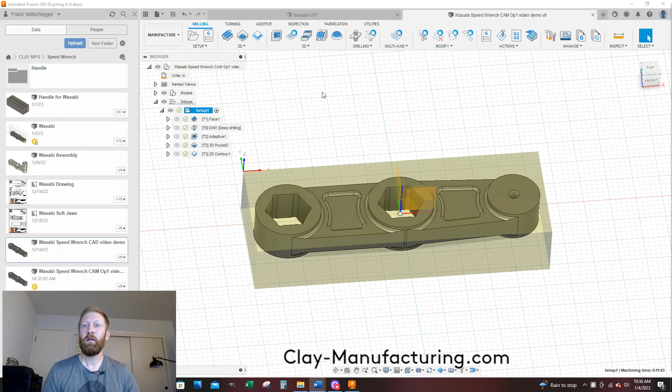This is the Wasabi. It is CAM Op 1 Part 2. My other video was CAM Op 1 Part 1, which went to 30 minutes so I had to end it. This one we're picking up working on the top side of our Wasabi Speed Wrench. If you don't know what I'm talking about, go to my CAM Op 1 Part 1 and pick up there. Now let's look at where we left off, here on my last video where we cleaned up the inside of this hex. Now the next move is we're going to clean up the outside of this part. This is where we left off.

We're going to go 3D and do contour. For tools, we're going to use a 3/8 flat end mill, that's my tool 2. So a 3/8 flat end mill, select. Then spindle speed, 6,000. I'm using my defaults, 30 inches, and you can look at them and double check for yourself.

So for geometry, this is where it's a little bit tricky. For additional offset, I'm going to try not to do additional offset and see what happens, because I have my notes I'm looking at, so I know what should work.

All right, so you want to do avoid touch surfaces, and we want to tell it what surfaces we want to touch. I'm going to go, for the mode, touch. And I'm going to come over here and select all these faces that I want my contour to touch.

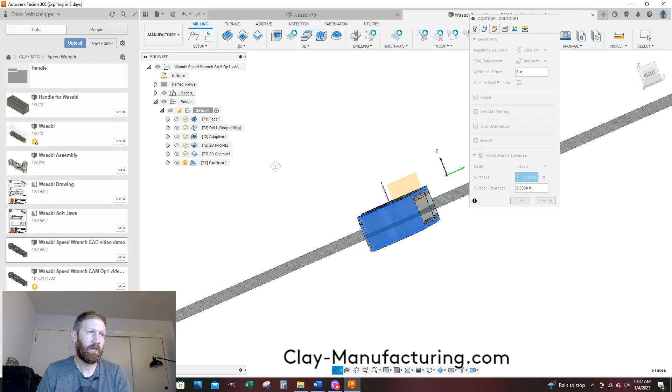So that's good, it says I have 5 faces. My instructions say 7, so probably these 2 guys. I'm just waiting till it kind of turns that weird white. And if you select the wrong surface, I believe you can click on it again. Oh no, you can't, you might have to clear it all out. I lied, so don't screw up.

7 surfaces looks killer. In my notes, I have an offset of 0.5 here. I'm going to leave it off there, and if I have issues, that will be my issue.

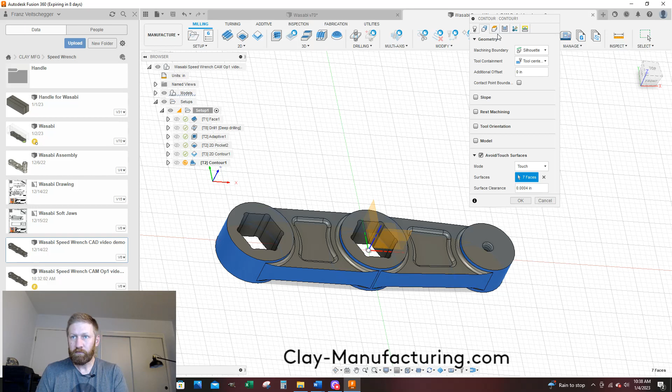Then let's go to heights. For model bottom, we're going to shoot past. I'm going to leave all these, and we're going to go negative ten thousandths, negative 0.01. And then for the passes tab, this is where you're going to get some Fusion annoyances. Maximum step down is 0.4. I want it to go all the way down.

And then it says cusp height. Cusp heights are typically when you use a ball end mill. I'm using a flat end mill, so this irritates me deeply. But it's just going to have orange, as long as your toolpath is produced, it will work fine. In the meantime it's going to have these stupid little orange warning signs saying it doesn't like what you're doing, but it will work. So for flat area detection, I'm going to deselect that. I'll leave this, I'll select smoothing, and I think we're good there. We're just going to have this glaring at us for the rest of this project.

Fun, no multi-axis. Linking. Ooh, I have this all squeezed up real tight. Maximum stay-down distance, 2 inches. I'm going through here just making sure. I think this is all the same.

Oh no. I want to, for the horizontal lead-in radius, let's make that big, because it's going to roll on the part, and we want a nice sweeping lead-in so it's hard to see witness mark. So we'll go 0.2, pretty big. Go 90. Vertical lead-in radius, nope, don't want that. We'll say 0.0. So all I changed was horizontal lead-in radius and vertical lead-in radius.

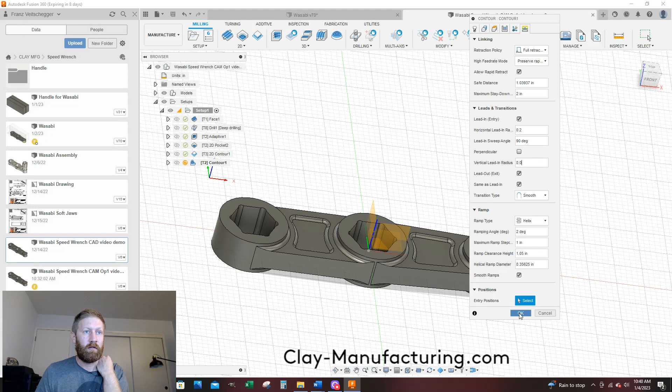And now let's say OK. And this is talking about that warning from the passes tab. We're going to say yes. And so it didn't generate, and I guarantee you it is because of what I said in the beginning.

So let's right click on here, say edit, and I'm going to go to my geometry tab, and give it that offset that I had in my note. So it didn't know what to cut, we need to fix that. I'm assuming the way this is working is I need to give it offset because it's tool center on there, so it's going to cut the geometry. This is a 3D toolpath, so 3D toolpaths recognize 3D geometry, and it's like okay, I'm going to cut this thing, so it's not going to work. So let's say 0.5 to get an offset to kick off of there.

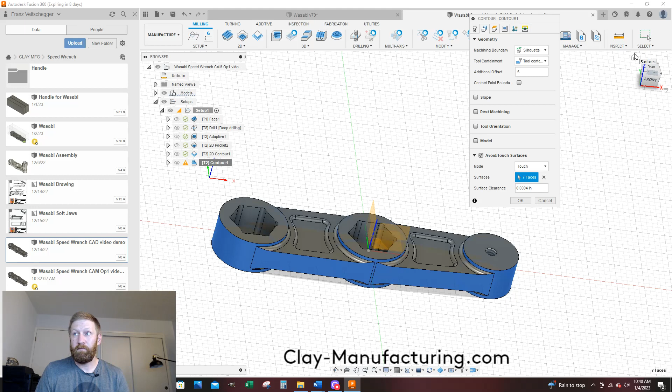That's what I'm assuming, don't take that to the grave in case I'm wrong. This is just a warning from my cusp warning. There we go, so it does this kind of kooky lead in, lead out. That's okay, it's going to work. That's how I've been doing it in the past, and it works fine.

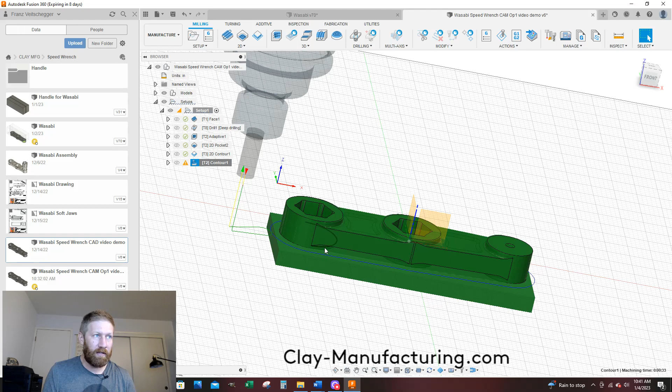So the whole reason it's kind of weird to set up is because we have these different depths right here. It's not just one solid part. The bottom of the part has these stands, and then it's got these that are at a different level, so it gets confused.

There's another way you could do it where you could actually project a sketch to the bottom and then just select that sketch, and then do a 2D contour, which is probably easier, but it's a little more complicated trying to create instructions around it, so that's why I'm doing it this way.

And this orange warning is because of the cusp height. We're not using a ball end mill, so just ignore the warning. And I'm going to say save.

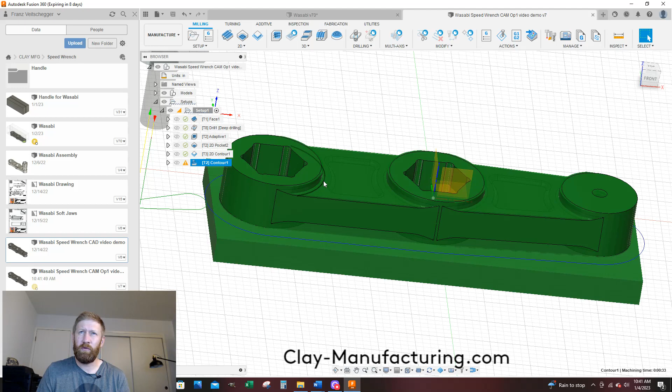The next one I'm going to attempt is the 2D contour. We're going to do a 2D contour. Let's look at it, let's look at my cheater one. So these are what I'm going to do next.

I played with a lot of adaptive strategies. I didn't like the surface finish they gave me. So on here, I did a 2D contour and did 2 passes to clean up these flat webs.

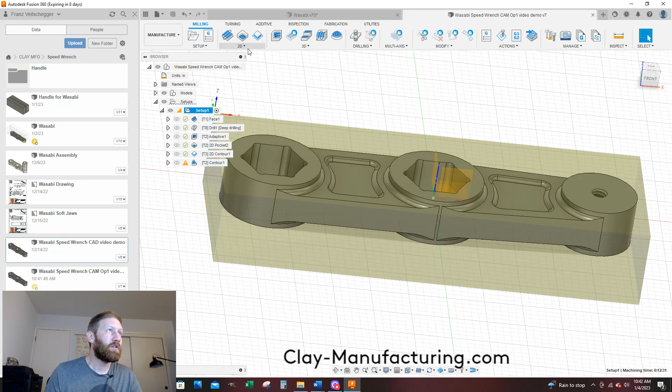So let's do that, let's go 2D and we're going to go contour. And we have our 3/8 flat end mill, 6,000 RPM, 30 inches a minute. So for our contour selection, we're going to do one side at a time.

So I have it set up. We're going to go select and select. I think that's all for this one.

We're going to go to my heights tab, and I'm not going to change anything. We're going to go to my passes tab, this is where we might have to do some stuff. So we want to do multiple finishing passes, so we're going to check the box, and we want 2 finishing passes, and for the step over, let's say 0.2.

Since it's only removing like 5 or 10 thou off the bottom and sides, I think it's 5 thou, we can do a large step over and it's not going to break our tool or give us chatter. It shouldn't, so we'll go 0.2. Finish feed rate, we'll leave that at 30. We'll turn on smoothing, and hopefully I didn't miss any notes.

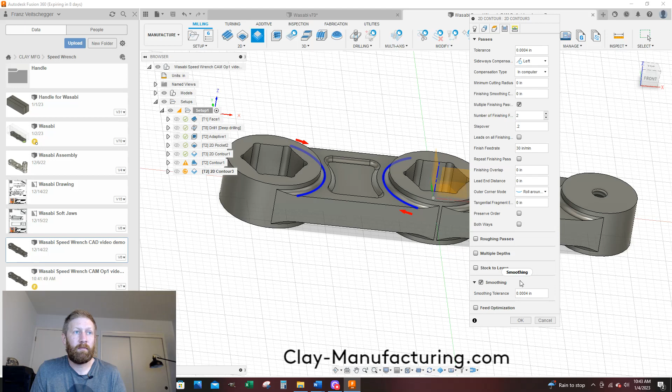Let's go to my linking tab. And let's go 375, 90. Let's get rid of my linear lead-in distance. We'll zero that out. Vertical lead-in, we'll zero it out because it starts off the part if we did it right.

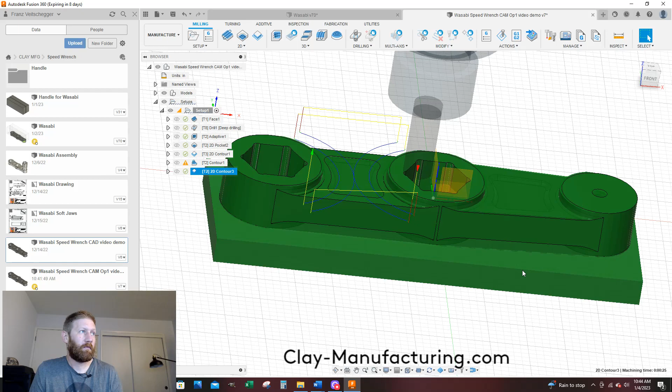Why do I have something clicked? Perpendicular, no, yep, all right, looking good. I'm going to leave these and I'm going to say okay. Oh yeah, that's looking good. So you see it starts off the part, it does this little lead-in radius and then cuts and walks in, it looks like. Now that's good.

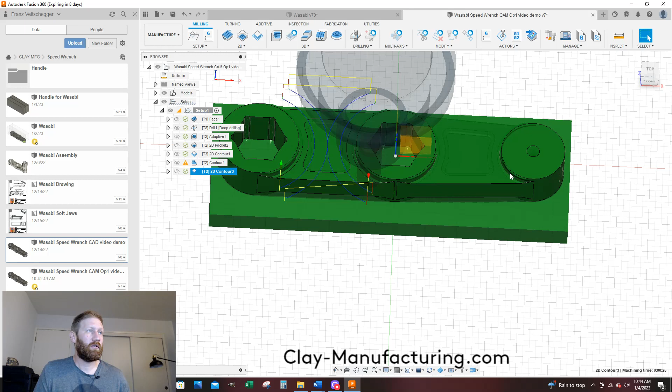Why did I break it up? I don't know right now. So I'm going to... I don't know why I didn't select these ones on there too. I'm going to show you how to duplicate a toolpath, and not to confuse us more like I've been doing, so I'm going to right click on here because I want to repeat this on this web.

And I'm just going to say duplicate, but I got to select different geometry. So I can click on here and I'm going to right click and say edit. And for geometry, instead of those chains, I need to select these ones. And you notice, I wish I could go back in time and fix it, but I selected this bottom part and not the top part of that radius.

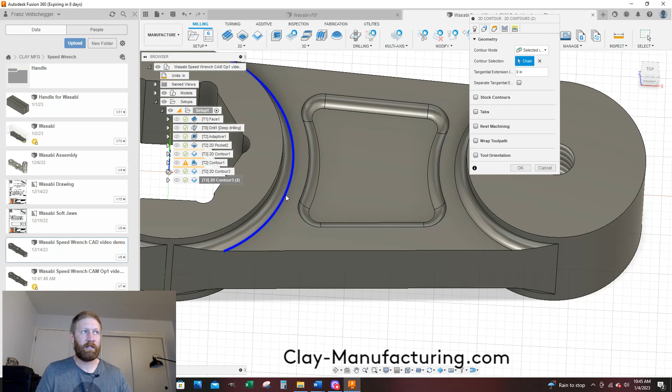Let's clear these out, and now I'm going to select over here. So I selected the bottom right there. It's kind of the transition where it blends into that bottom face, and then right here. And everything else should be the same. I'm going to just say okay.

Ooh, it's not. So you see how I have these little chunks right here? This is why I did it, and I didn't have it in my notes. So I probably changed my step over. There's a little triangle that I didn't clean up there. So let's look what I did on my other one.

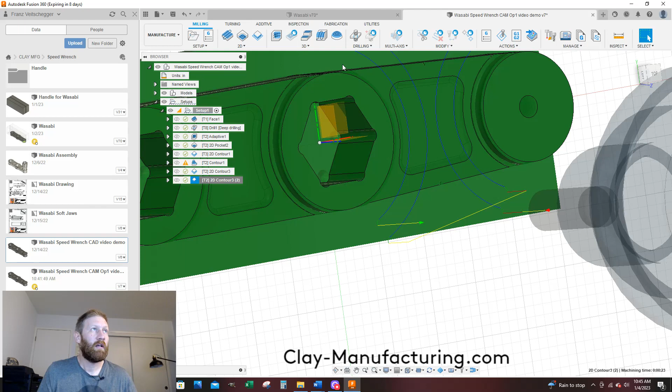So on this one, I might have changed my step over. Let's go edit. Yes, I did, I increased that step over, but I didn't put that in my notes. Shame on me. So you see what I did there - in the beginning I just selected here, and then I was like, why didn't I just select this geometry while I was at it?

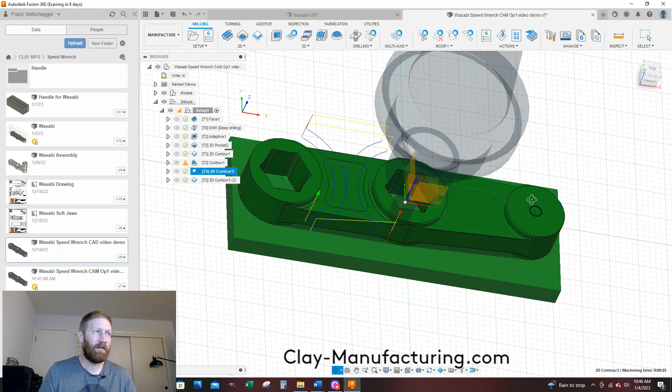Well, it's shaped differently, and when I use these same parameters, it didn't clean up over here. Maybe I could have tried a 0.25 step over here, but then these would have overlapped more. So I did it different - you can do it a little bit different if you want to. This isn't a big deal, it's just how the surface looks.

And then this one, so I copied everything besides the geometry selection, but it left me these little steps right here, which aren't going to look too cool to my customer, which is me or you. So I'm going to right click and say edit, go to the passes tab, and increase the step over to 0.25. So all I did was right click on the contour, edit, clicked on passes, set it to 0.25, not changing anything else. We're going to say OK.

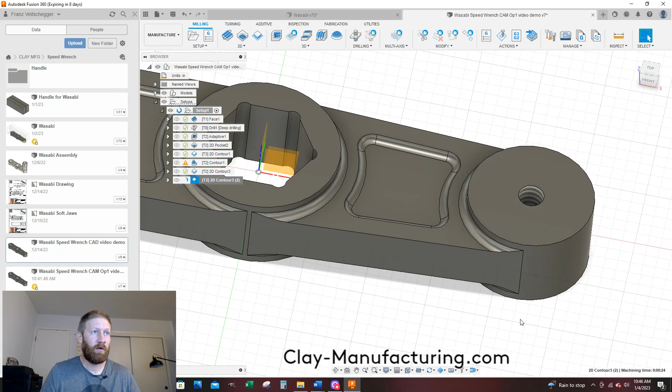And voila, I have that weird little nub - it has been removed, taken care of. Cool. And I'm going to say save.

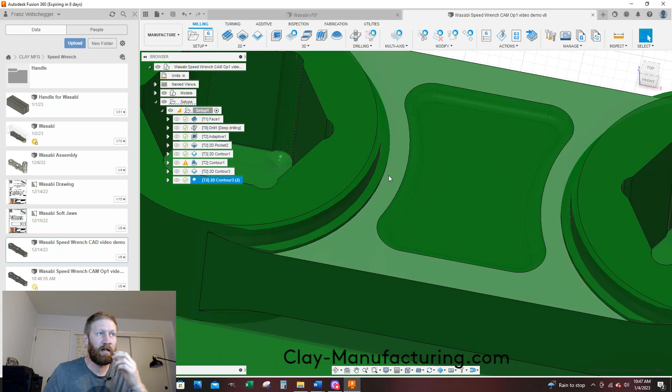Now the next one, we're going to introduce our 1/8 inch ball end mill, and we're going to try to gently cut these weird steps out and then put our nice finish on there, because that horizontal pass gave us a surface finish here. So let's attempt this one - this one's going to be tricky. These are a little bit tricky.

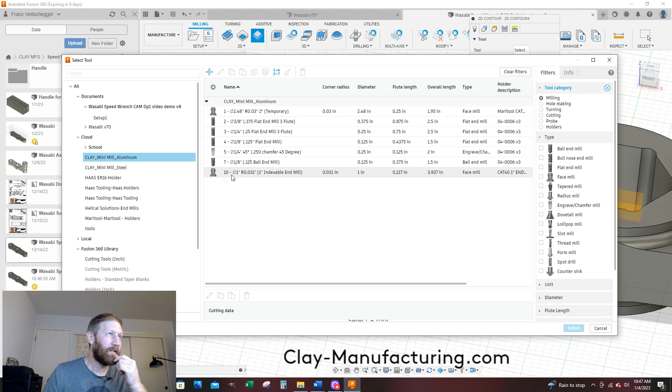We're going to do a 2D contour, using an 1/8 inch ball end mill, so I'm going to go get my tool. Let's go to Clay Mini Mill - my 1/8 inch ball is my T7. Say select. 6,000 RPM, have that baby maxed.

Cutting feed rate, we're going to increase this to 20 inches a minute. 20. And then these ones update, that's good. Leave these bottom ones. Now for the contour selection, this is what I pulled my hair out with last time.

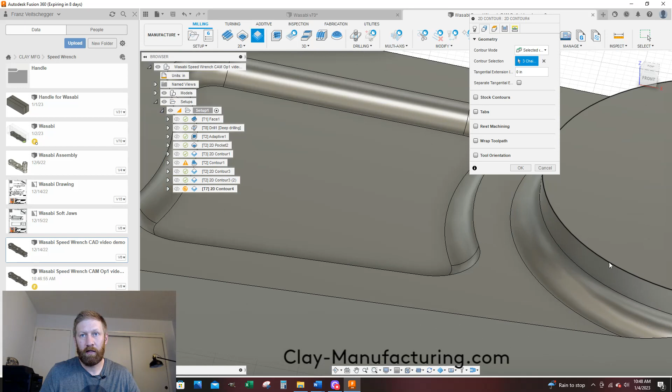Is I need to select this guy right here, and I need to select this guy right here. Now I may come back, I don't remember if I did all these - let's just try it for kicks. So we're going to select there, and yeah, I think I did all of them. I did 4. So here, I'm selecting the top where the radius meets the vertical wall.

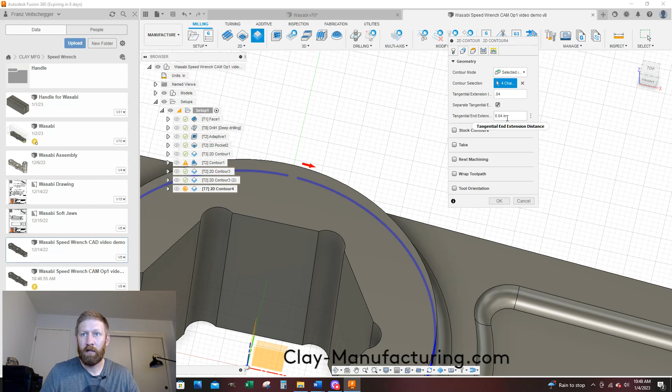That's what I'm selecting. And now for my tangential extension, I want it to come off - that's where it's going to come off the part. We're going to say 40 thou, 0.04. And I also did a separate tangential extension, I clicked here and 40 thou. And I believe that's all I did here.

Now my heights tab - for my bottom reference, I want to do a selection. So I came down here, I'm going to go selection, and I want to tell it that this is the bottom, I want that to be the bottom. And then for the top height, I left that as a default. And then we're going to go over here to our passes tab.

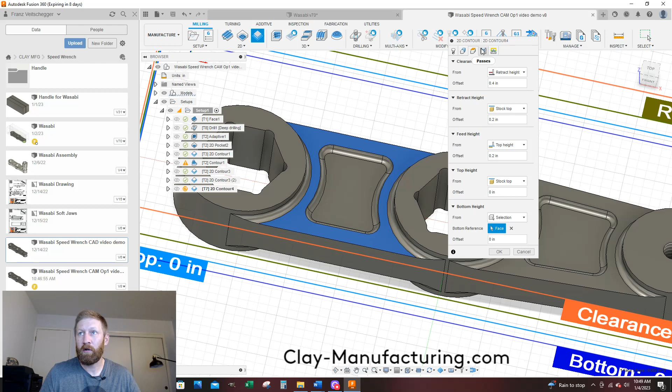And we are going to increase it, we're going to do 2 passes. I want to kind of gently walk in, and I'm going to leave the tool from coming in contact with the floor right now, because I don't want to have 2 step over marks. I want to get it really roughed in close and then come with a final single pass cleanup. This is a pretty complex toolpath - a lot of stuff going on here, but you can learn a lot.

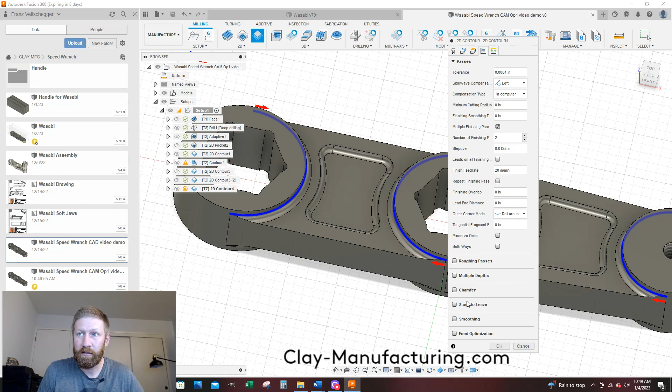So we're going to go multiple finishing passes, and this is 2, and my step over I left at 12.5 thou, 20 inches a minute, and then stock to leave - so let's skip down here to stock to leave. Let's drag you up a little bit.

Now on the radial, on the side of the tool, I did 2 thou, so 0.002. And axial, under the tool, I did 1.5 thou - yeah, so 0.0015, a little less. And you can play with those numbers if you don't like what you see at the end, but it came out pretty nice. So stock to leave, I left a smidgen more on the radial and a smidgen less on the axial. And a smidgen apparently is 0.5 thou in this example.

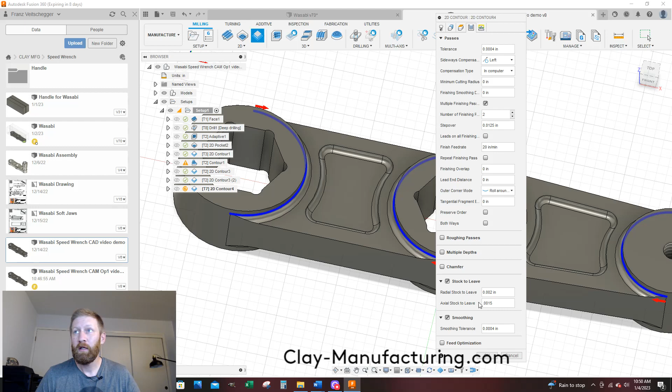And then let's do smoothing - so I'm going to select a smoothing box, and that's looking pretty good. Let's go to my linking tab and see if I need to change anything on here. Lead in, entry, horizontal lead in - I did a 50 thou here, 0.05. So horizontal lead in, I changed to a 50.

Lead in sweep angle 90. I got rid of this lead in distance, so 0.0. Vertical lead in radius, let's get rid of you. You're annoying me, 0.0. And I think that's good. We'll say okay.

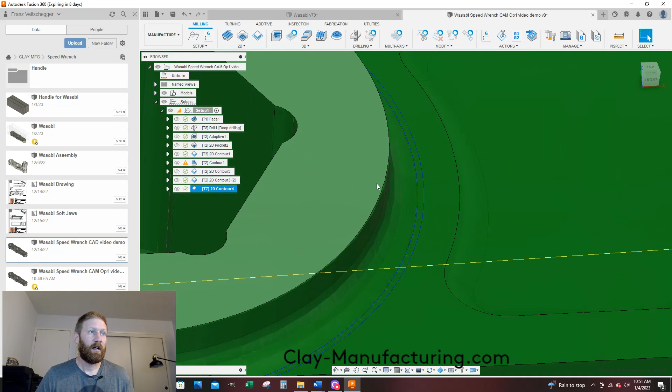And that's looking what I want. The reason I did 2 is because you see we have this weird step. So I kind of did one first that's going to probably be a little more chattery, and it's going to take off like the initial amount. Then I come in another 12 thou, and it does another kind of roughing. It still leaves, I leave a little radial and axial, so there's still a little bit of material. And I didn't want 2 marks on this surface. I want to come in and leave 1 mark because I'm being ultra picky on my surface finish. So I'm going to say save so I don't lose any of my work.

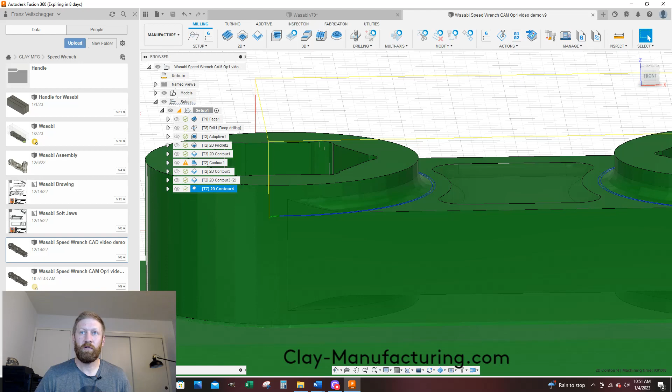We're going to do that little duplicate because I already have this all dialed in, and I'm just going to duplicate this bad boy. I'm going to go right click and say duplicate. And now I'm going to go on that one that I just duplicated, right click, and say edit. The thing I'm going to change is I'm going to go to passes.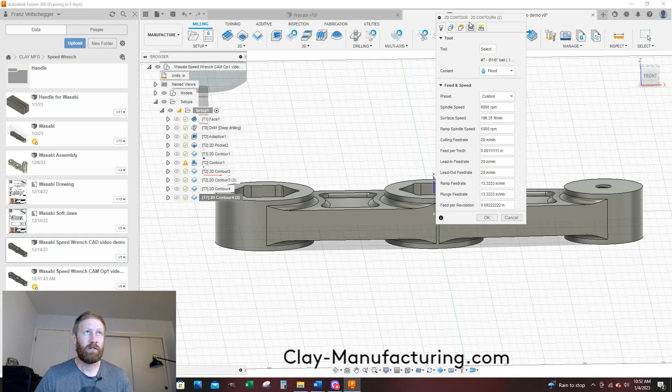No, I'm just going to deselect this. So multiple finish passes, no, deselect. And then stock to leave, get rid of you. And I want to do my feed optimization. I will leave the defaults.

So let's go over this. I duplicated my prior toolpath. I did a right click, edit. I removed the multiple finishing passes. I removed the stock to leave because I want to go down to my nominal size now. And I don't believe I touched anything else. We'll say okay.

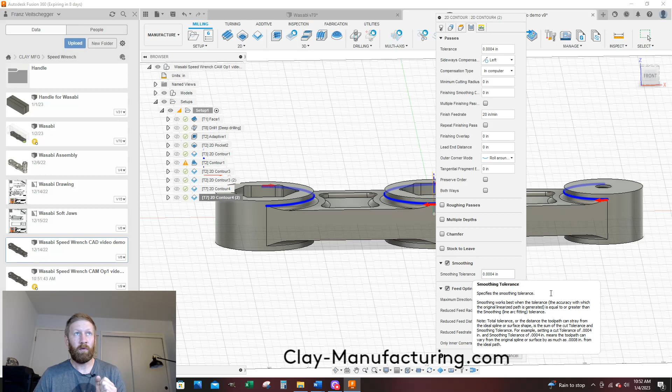So now that comes straight. The center of the tool is supposed to be on this line. And I modeled this at 0.0625 so it'll clean it up and then straighten up according to my tool geometry. And we're going to say save.

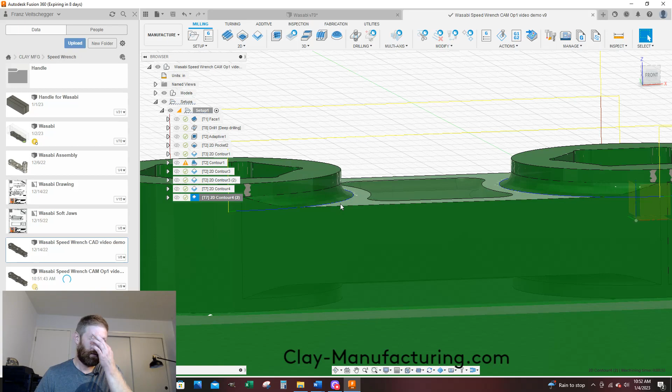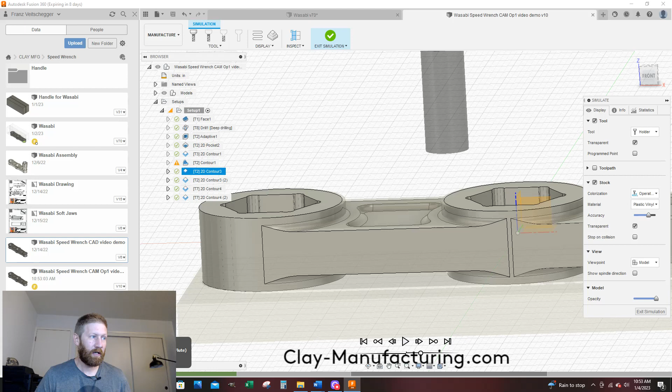So that's looking good, and you can go through here too. We'll go like this, I'm clicking on that one. I'm going to hold down shift and click on there just to select these end toolpaths. And I could go actions, simulate, and I'm just going to drag the bar down here and kind of go real fast. You could go through and simulate it.

And this is what I was wanting to show was this guy. Get off of here window. I'm going to say play. So that comes in there and you see it's going to knock off. It kind of blends into that wall and it knocks that bottom step down and it goes around there.

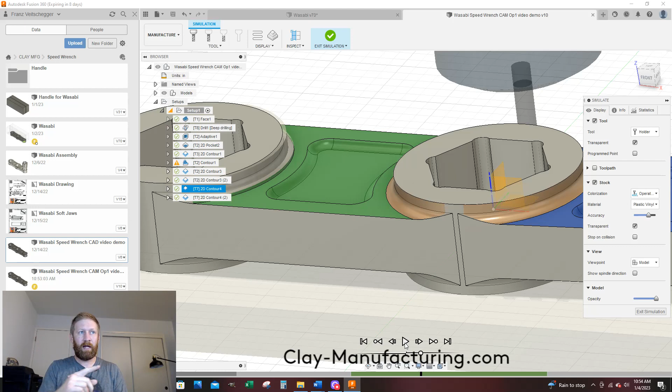So it's still leaving material here, material there, and it's going to come back. It's going to do the first pass, I guess, to the second pass there. Now it's going to come back and do that second pass. So now it has it where there's no step in there. So I'm basically roughing it in to the shape I want, and then I'll come back with one finished pass because I left material on the bottom of the tool and the side of the tool. And so when I come in with just one pass, I won't have 2 tool marks walking around there.

So it won't look funny. I did that in the beginning and it looked funny. That's why I know from my mistakes.

All right, so I exit out of simulation. Let's see what we did next. I already saved it. So let's see, oh yeah, so we're just going to rough out these 2 pockets, those pockets on the web. We're going to go 2D pocket.

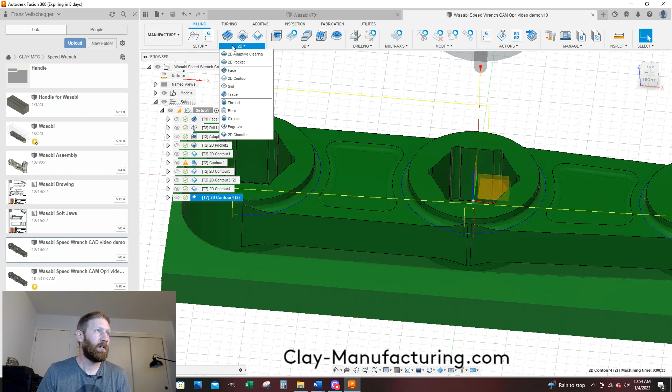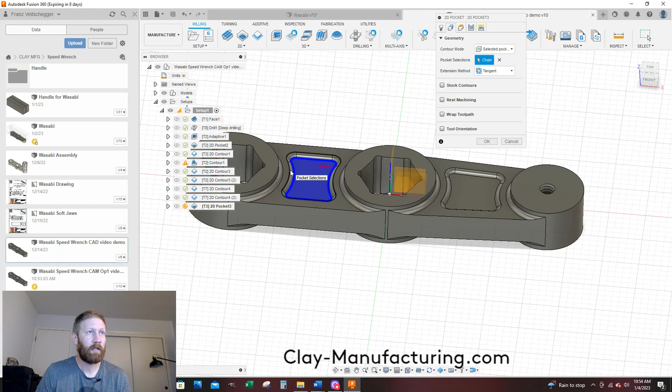And I'm going to do my 1/4 inch end mill. So select 1/4 inch flat end mill, select 6,000 RPM. We're going to leave our 25 inches a minute feed rate. We are going to come in here for geometry and I want to select this bottom ring right here. Same with this one, I'm going to go right here. So it's where the floor meets this radii.

Cool, that's what I want. I'm not going to do anything else with heights. Actually, I did change something here - for top height, I'm going to change this to model top. If you don't do that, it'll try to cut on the top of the part, and you need to change it to model top so it stays inside that pocket, I believe.

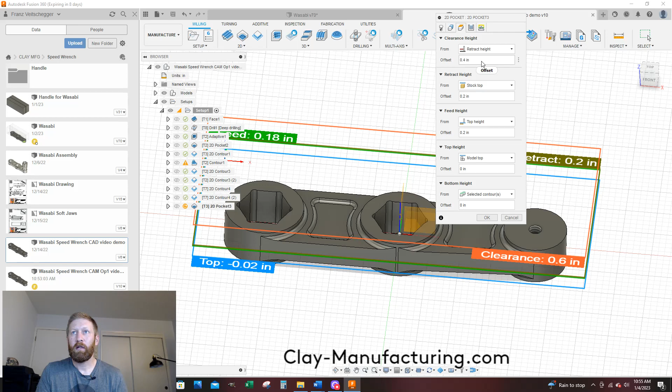I could be wrong, hope I'm not. All right, passes tab. Let's see what I did here. So max step over, I did 10% of the tool - oh no, more, because this is a 1/4 inch, so I did bigger. I did 0.0375 because it's going down, like it's a really shallow depth of cut. It's not a big deal. So my step over is 0.0375.

Stock to leave, I did 5 thou radial and axial. So 0.005, because I'm leaving material, because later we're going to come back and do this cool little detail with my ball end mill to make it look cool. So I'm leaving some material for that ball end mill to cut.

And then let's do smoothing, and we're going to do feed optimization. And I'm going to change the feed radius instead of 12 thou to 125 thou, so I'm just removing that 0. It's 0.125, so I updated right here 0.125 for the feed optimization.

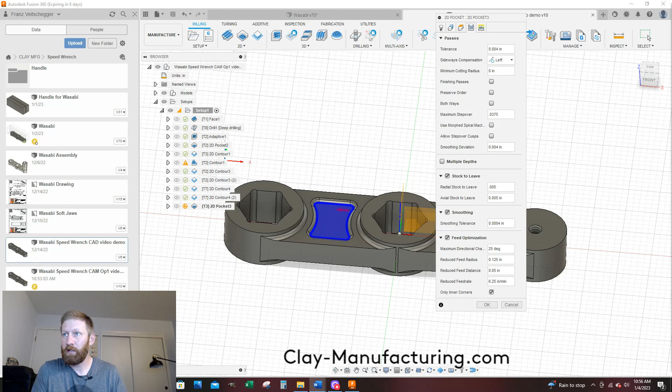My note page is too squishy. Let's go to my linking tab. Just kind of going through, verifying my numbers - 90, linear lead in, I left that. Since this is going vertically down, I left the vertical, because if you plunge straight it's a lot more aggressive on the machine and tool versus kind of a ramp or a radius ramp in.

It looks like all this, ooh, ramp clearance height - so I reduced this, maybe so I didn't helix in the air so long. So I went to 0.05. This is not crucial. Ramp clearance height, I reduced it from 0.1 to 0.05. And I think I left everything else.

Let's see how this sucker goes. I'll say okay. Cool, so this is kind of an annoying helix down. Top height, let me see something - I'm going to see if I edited that out of this one. No, I didn't. Okay.

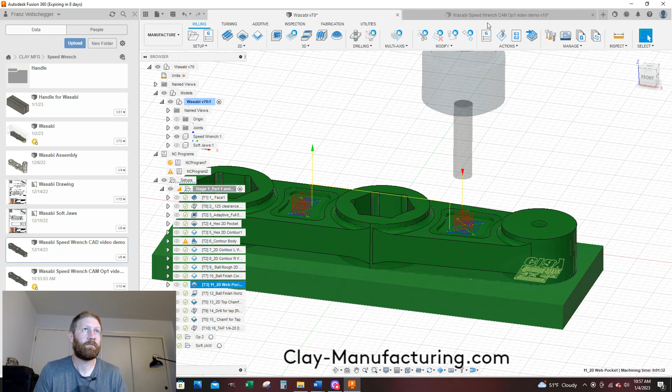You can play with your heights to remove that. It's just annoying because it's such a slow feed, so it's going to sit there and helix and cut air for a while. But if you're new to this, that's not a problem to cut air. But if you're trying to make money, you need to reduce that air cutting time because you ain't making money cutting nothing. So that's looking good.

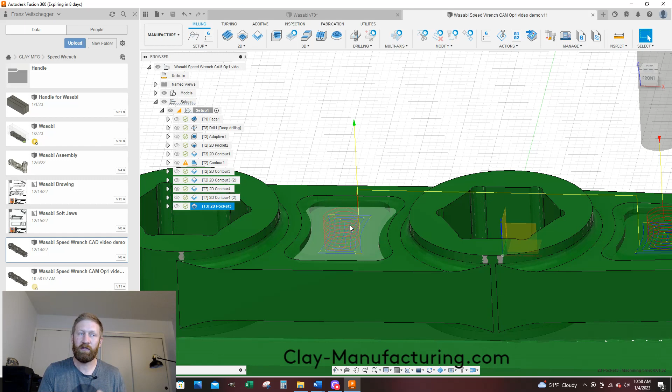I'm going to save. And so the purpose of that tool path, because I'm going to stick my 1/8 inch ball end mill in there, but I couldn't just do it initially because that's a lot of material for it to remove. So my 1/4 inch end mill is a lot stronger. So I come in, I rough it out, I leave a little material on the bottom of it, and also you see there's a lot of material here on the sidewalls where my tool couldn't go, based on my settings. And really that's okay for what we're doing.

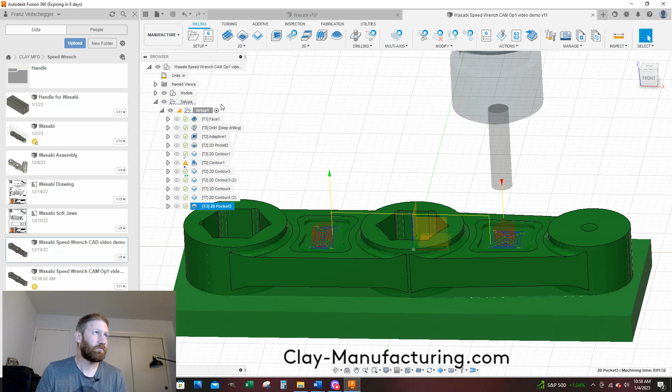So my next one is going to be a horizontal, I believe. So we're going to do a ball finish horizontal. We'll go - no, it's not a 2D, it's a 3D. We're going to go 3D horizontal. And I'm going to leave this thing at 6,000 RPM. We're going to reduce the feed rate to 20 inches a minute. I'm going to start speeding up a little bit because, man, this is so time consuming.

That's looking good. We're going to geometry tab, and then I want to do a selection, and then tool outside boundary. We'll change additional offset to 0.125, and that's good for here. Oh, I gotta select geometry, stupid.

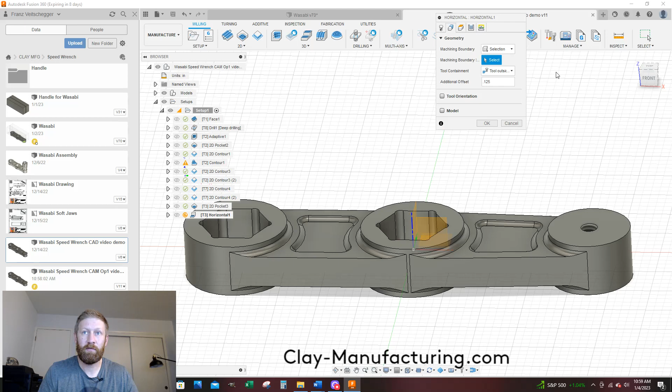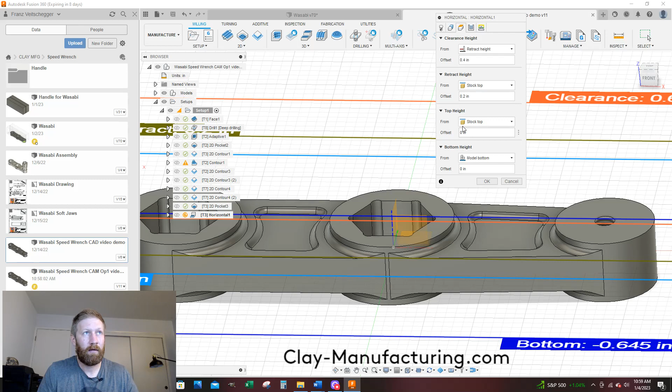So for the machining boundary with this highlighted, I need to come down here. I'm going to select this guy, and then I'm going to come and select that guy right there. So now I have these two chains selected. Now let's go to heights tab, and for the top height, so I don't machine anywhere else besides inside of here, I'm going to go top height, selection, and I'm just going to select this top face. And so these are on the same plane, so it'll be the same for both.

Bottom height - I'm going to go selection, and it's freaking out. Don't worry, I'm going to select that guy.

And then I forgot to do something. For my top height, I've got to cheat this thing. If you leave it at 0, it still tries to cut on the top, since it's a 3D toolpath, it recognizes 3D geometry and will cut it. So I'm going to say my top height is minus 0.001 below that surface I selected. I'm just saying it's a little bit lower at 1 thou. That's nothing, we'll leave that.

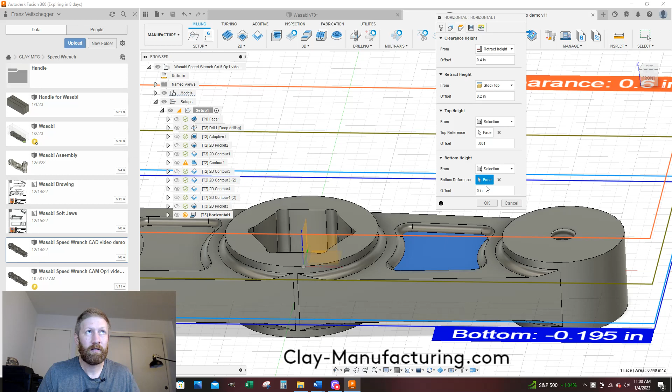Bottom height, yep. Passes tab, now this is where we need to do a manual step over. So I'm going to click right here and I want to do 15 thou, that's the step over. So each pass will be 15 thou over from the previous path. And that's not that much. Your human hair is about 4 thou in width and thickness, but it'll go faster than you think.

Machine time wise, we're going to do our smoothing, feed optimization. I left, huh, my feed optimization had smaller numbers here, but we're going to leave these defaults. Mine was half of this number.

Oh, did I select the wrong tool? Nope. Yes, I did. So I'm not going to go back and fix this. The reason those were different was because I'm stupid and I didn't select my 1/8 inch ball end mill. I just selected the toolpath, verified the feeds and speeds without checking the tool. So I'm going to come here and go select. And it happens, this happens all the time, so I'm not going to edit it out. It's real. That's my T7, and that's my 1/8 inch ball end mill.

So now I got my right tool. And let's adjust the feeds again. So this, I had 20 inches a minute, not 15. So all I did, let's go 20. I did a right click, select, change the 1/8 inch ball. Now I got to change the speed again. All my other stuff shouldn't matter. But now let's look at this. This is all good, and now that number matches my notes.

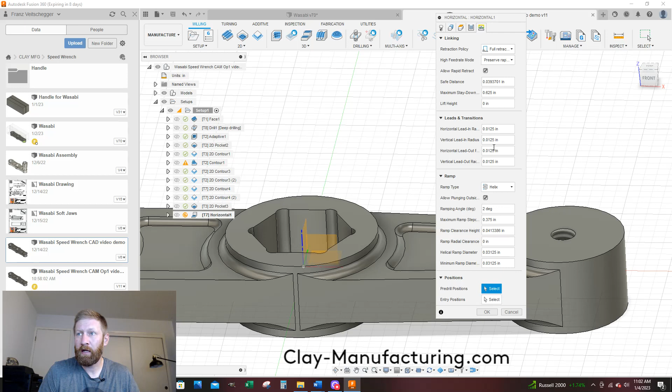Awesome, looking good. Now let's go to my linking tab. I'm just kind of verifying, I'm slowly going down. I think I can leave all these. And I'm going to say okay. There we go, it's cleaned up. It didn't cut on the top. Now, if it's cutting on the top here, it's probably has to do with your heights tab, what you selected, and if you cheated with my minus thou or not. So make sure that's correct.

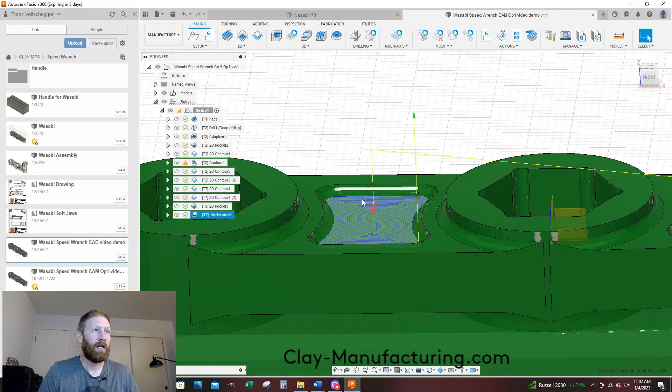And I'm going to look at my other one just to make sure everything is matching. I'm just kind of looking, it looks good. So this one just goes like boom, and this one just starts from the center and goes that way. Weird, but okay. Same, awesome, so those all match. I'm just checking, because if those didn't match, it means I probably did a parameter different, but it matches. I like it. Okay, we're going to get through this, guys. Let's save our work, 27 minutes.

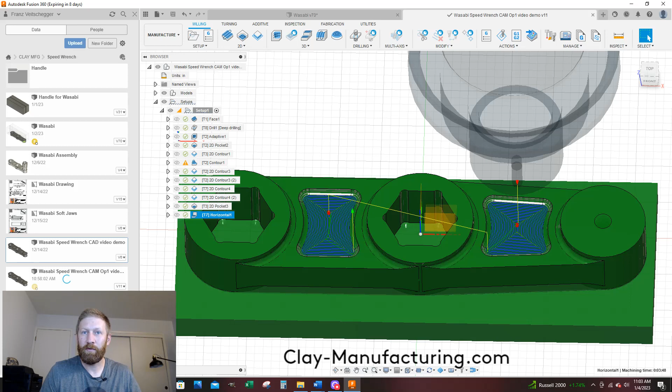Ooh, now we're going to do a chamfer. This should be pretty easy. We're going to chamfer all the surfaces, all the edges except this one. I'm going to do a 2D chamfer. I got to select my tool first. I'm going to go to my clay mini mill, aluminum. This is my T5, my 1/4 inch 45. We'll say select. And I'm going to leave this baby maxed out at 6,000 RPM, and I want to leave it at 20 inches a minute.

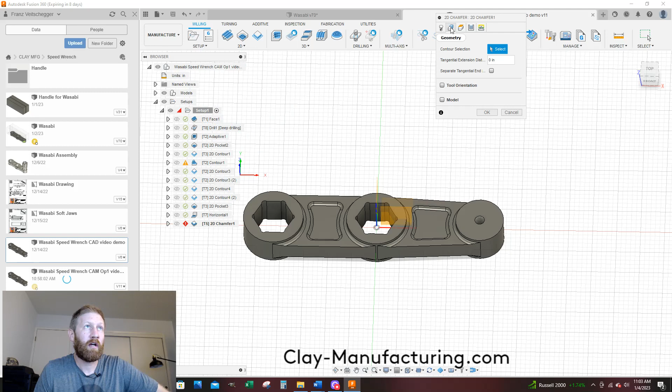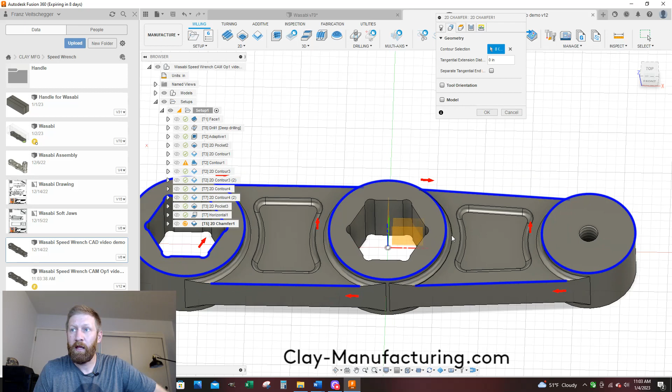Geometry, I'm going to come here and just get all these top surfaces. Not this one, because it will bury the tip in that edge. Oopsies. So I'm going to get this guy, that one, that one, that one, this one, and I think that is it. So I have 8 on here, and on my, oh, and I forgot him, 9. Thank goodness for notes, if I didn't have my notes, I'd be really messing you guys up. So I have all these top edges, I just want to break them.

But I believe I leave everything the same here. I go to my passes, and for my chamfer width, I do a 1/10 thou. I'm not going to get into the detail, but if you have chip chamfers and you don't know how to use your height offset on the control for wear, I would reduce your chamfer number because it's going to bury that chamfer deeper in your part.

So I have a nice pointy tip, so I'm going to leave my 1/10 thou. I'm going to leave 40 thou for my tip offset, which is just how far the tip is offset away. Read the boxes, we'll leave that.

We're going to do smoothing, and feed optimization. Leave the defaults, and let's go to my linking tab.

For horizontal lead-in radius, I'm going to say 50 thou, 0.05. At 90, we'll get rid of linear lead-in distance, go 0.0, I don't need it. I don't need this because we're starting out in air, not cutting vertically down. 0.0 for the vertical lead-in radius.

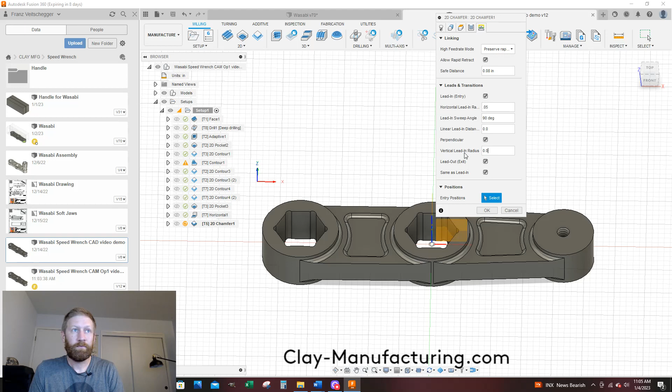And then I did do an entry position on mine, so I probably did them in here so it didn't enter into those flats. So I'll select those points. I don't remember which ones I did. I'll say okay.

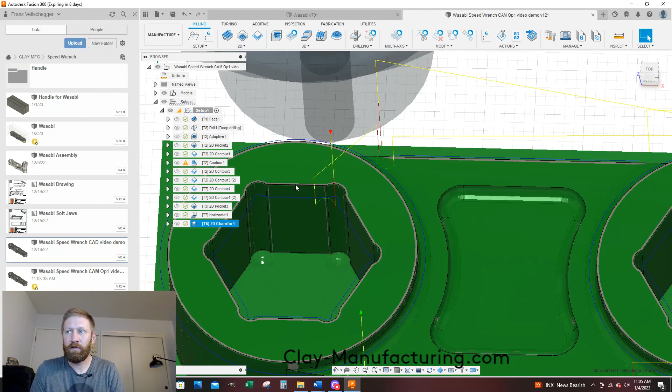And yeah, so that way when it's leading in and leading out, it's doing it here versus right in the center where you might see a witness mark. It's not a big deal, but it's just to hide your tool marks. So I broke the edge.

I'm going to say save. Now the last thing I really have to do is drill, chamfer, and tap that bad boy. So we are going to drill first. I'm going to go drilling, and let's see.

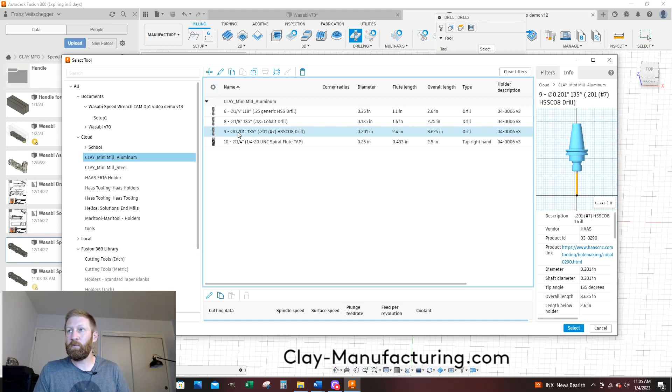I'm going to go select my mini mill library. Mine, it's a .201, I'm using a cut tap. If you're using a roll tap, your drill diameter will be different. So I'm using a .201 drill. Say select, and it's my T9.

And my feeds and speeds are proper for what I'm doing. I preset these, so if you download it, you should have that. Those all look good. And then I'm going to go to my geometry, and for geometry, I just select that bad boy.

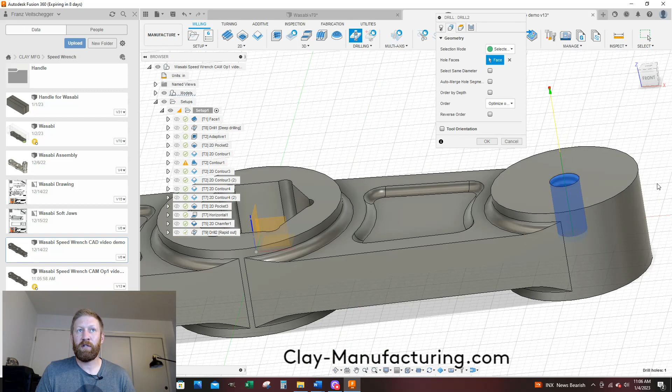And you'll notice I don't model chamfers because they're super annoying when you're selecting surfaces and stuff. Nor do I model threads. I don't check the box to model threads because then selecting faces is super annoying. So I have that selected.

Let's go to our heights tab. So this isn't that critical, the tap is the critical part. For bottom height, we're going to go drill tip through bottom, so we're actually going to go deeper than what it's modeled, I believe.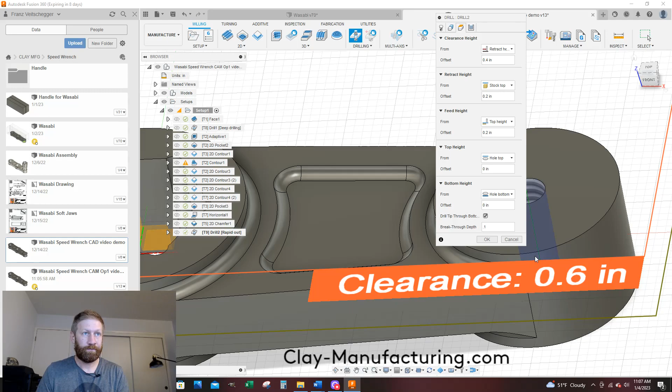And then we're going to go break through depth. I'm going to go 0.1 because I want to make sure that's going pretty deep. I want to always drill deeper than my tap is going. 0.1, so it's actually going to drill further than I have it modeled.

I'm going to verify. So hole bottom, offset 0, drill tip through, breakthrough depth 0.1. And you want to just make sure that blue is not going through here, you don't want to do model bottom or something like that.

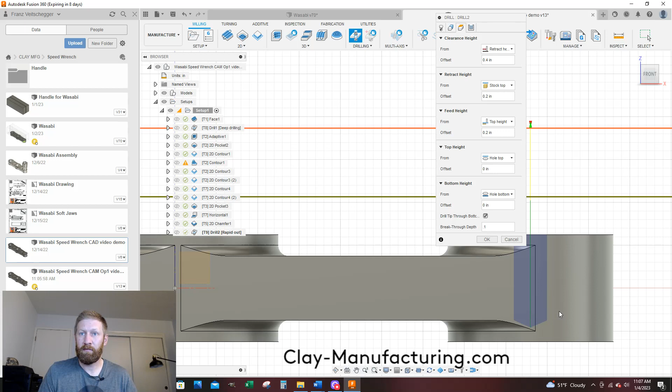Looking good? Looking good. And then hole top for top height, let's go here. I'm going to do just drilling rapid out, so that's not doing any peck drilling. You could just add some peck if you want. I'm going to say okay.

But it drilled it fine. And let's look at mine over here. Yeah, I went pretty deep, and I'm just verifying I didn't do any peck drilling or full retract. Yeah, I did not. Usually with a hole like this, you could get away with 3 times the diameter before having to peck.

So now we've made an entry hole for the tap, but I want to make a smooth transition, so I'm going to do a chamfer for the tap. I want to put a little chamfer on this edge before I send my tap in. So I'm going to do...

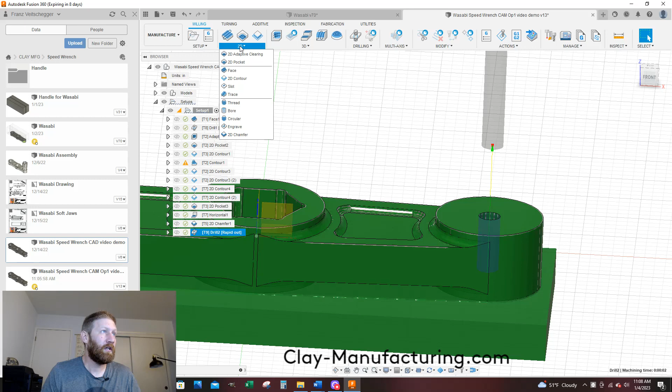2D chamfer. I have my 1/4 inch 45 chamfer actually, so that's good, it's already populated. 6,000 RPM, I'll leave 20 inches a minute. And for geometry, I'm going to just select that edge.

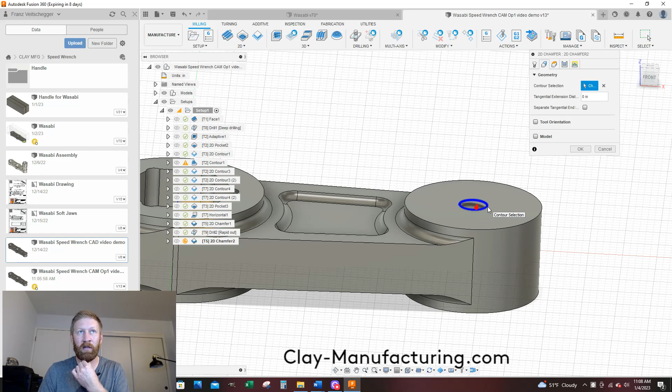Now, if you have modeled threads checked, it might give you some issues, or if you have a modeled chamfer, it might give you some issues. Let's go to heights. I just leave all these the same. Now passes.

For my chamfer width, I'm going to go a little bigger than normal. I'm going to go 0.02 because I want a nice lead in for the tap to go in. Chamfer tip offset, not changing it. Chamfer clearance, don't care, that's fine. I'll just do smoothing.

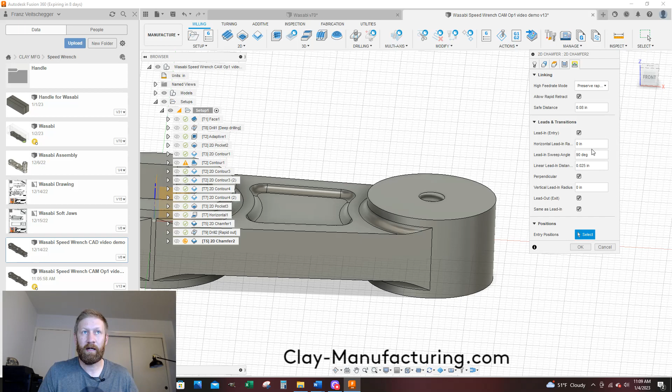And we'll go over here to linking. I'm going to leave that at 0, 90. Linear lead in distance is 25. Interesting, this doesn't matter as much. We're just going to say okay. If you do a lead in, it might not fit in there, so that's probably why I have that at 0. We'll say okay.

Let's try something, I don't like that. I'm going to go edit. I want to make a little, we'll try. I'm going to go lead in radius, let's say 0.01. I don't want a linear lead in distance, we'll just 0 that out. I don't need a vertical lead in radius, we'll 0 that out. I don't know why I didn't do this.

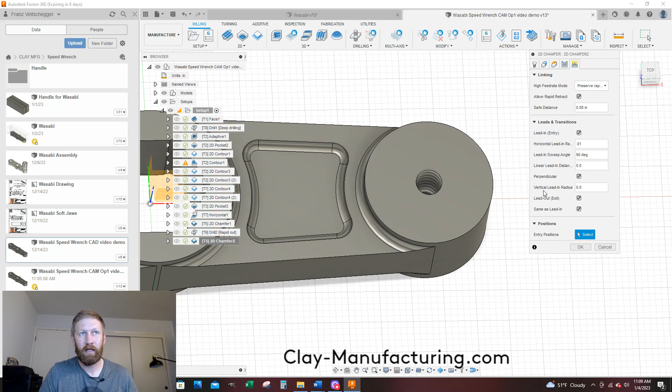Let's try this, we'll do a horizontal lead in radius of 10 thou. I 0'd out my lead in distance, I 0'd out my radius. Let's say okay now. All right, so there I get a little bit of a roll on. All right, I like that better. And I'm going to say save.

And then the next one up is the tap. So we will do drilling, drill, and I need to select my tool. I'm going to go clay mini mill aluminum. This is my 1/4 20, this is my spiral flute Haas tap 1/4 20 UNC. I'm going to click on there, say select. And I have it set up for my parameters, and so the pitch is 50 thou.

That's very important when you set it up. This is my surface feed, and I have cut beautiful taps. And this is where our depth, we're going to set our depth for how deep we actually want it to go. If you use a different tap, you might have to experiment on a piece of scrap first. So for this one, again, the modeled threads would jack me up, leaving all that. For heights, I want to change this.

So bottom height, I want to go from my hole top. So I'll go hole top, and I want the very end of my tool to go down negative 0.395. Yeah, it's not going to probably give you 395 of usable thread because there's a taper on it, but this works with all my parameters and for installing this handle on there.

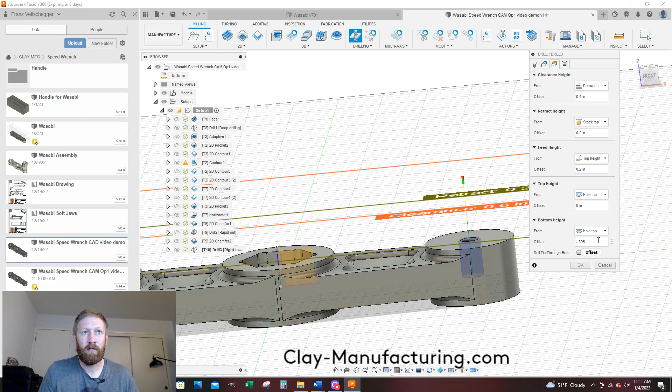You might have to experiment with your own setup, but this is going to work lovely for me. And we're going to go to cycle, and I go to tapping, and I just go to right tapping, and I'm going to click on here just to verify. This is all good, 395, hole top, hole top. That's good, yep, so this should all give you the correct recipe. Double check your pitch when you set up your tool is 50 thou, and we'll say okay.

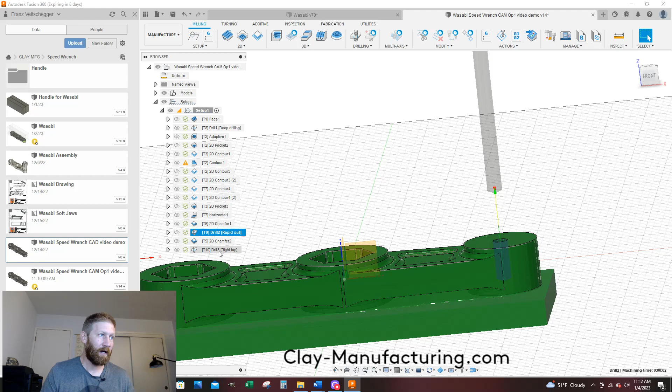And one more verifying thing that I do is I'll click on my drill, I'll hold control on my keyboard or command if you're a Mac, and I'll left mouse click on here. And then I just verify, because the skinnier one's the drill bit, I verify that my drill hole goes further than my tap. If they go to the same level, you see it will leave material like this wedge here. It will probably break your tap. So make sure your drill clears your tap.

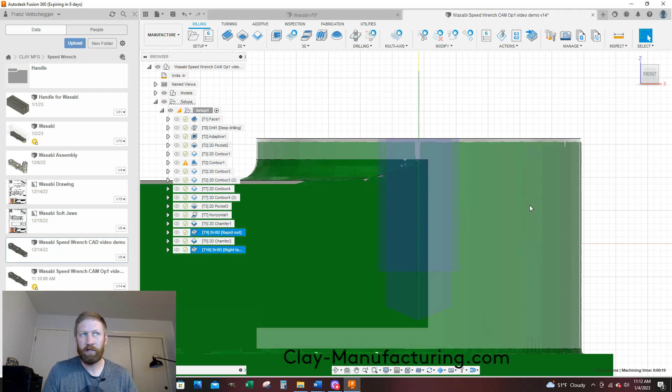And this is all of Op 1. If you haven't done this before, I recommend trying your settings on a piece of scrap, and that goes for any of these settings. If you're unfamiliar, get a piece of scrap and try it on that scrap before you wreck your part. I'm going to say okay.

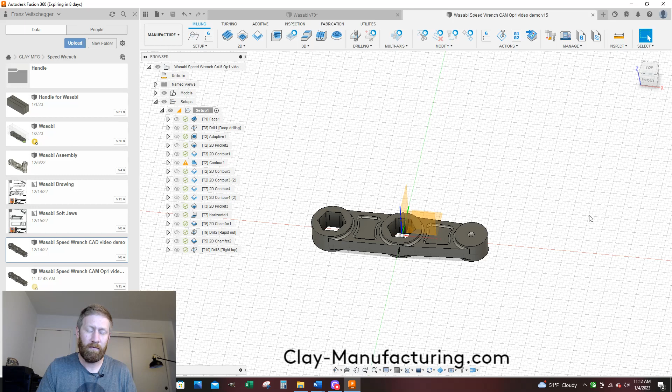I hope you enjoyed this. I know this was long, there was a whole lot of tool paths. My soft jaws will be next for creating a cavity in them, will be much shorter. And then the backside Op 2 of this part will be much easier because we don't have to do all these holes or threading from the top. It will really just be duplicating these tool paths and applying it to the back side.

But yeah, so look out for my next video. My next video will be doing the CAD and CAM for the cavity to machine the second side to this, because here I can't hold on this with a traditional vise because this goes tapered. So we're going to go over how to make your soft jaws in both the modeling and CAM environment before we can machine the backside. A lot of steps to this part.